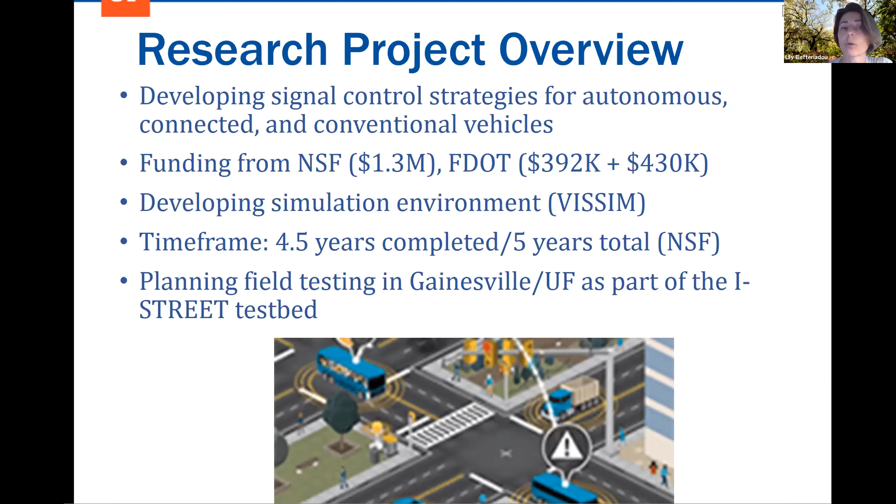This presentation today is on the two projects that I mentioned, one by NSF and the other by FDOT, and we are toward the end of that. We are in the last year. The project expires in August, even though this last year is the transition to practice. Because of COVID-19, we may not be able to do all the field testing that we're planning, but there's also a simulation component, as well as the field testing component.

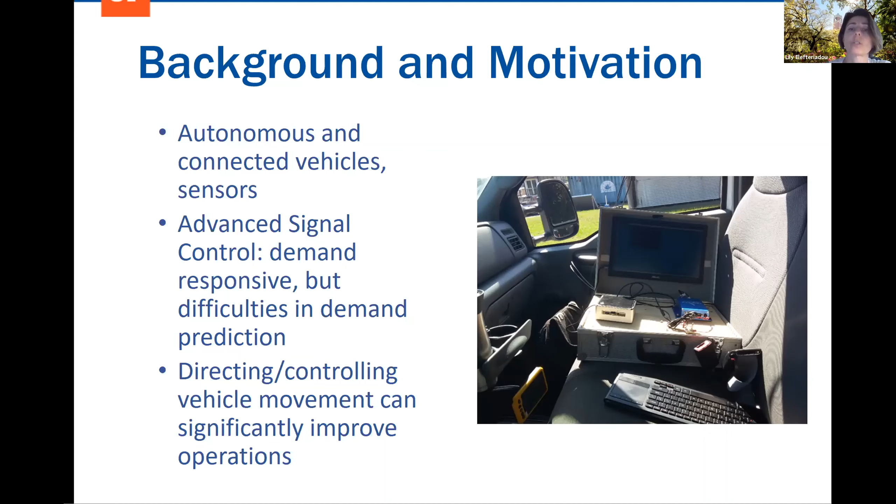The basic idea is taking advantage of autonomous and connected vehicle technologies—communication with the infrastructure, sensors, and autonomy—to optimize the way we do signal control. The state of the art with signal control is to be demand responsive, but when you have the ability to directly communicate with vehicles and get advanced information about their arrivals and destination, and in the case of autonomous vehicles to provide them with a recommended trajectory, that gives us a great opportunity to optimize the signal control together with the movement of the vehicles.

In our project, the objectives are first to develop novel optimization algorithms that would jointly optimize the autonomous vehicle trajectories and the signal control, so that we can minimize travel time and maximize throughput. We also consider connected vehicles and conventional vehicles, predicting where we anticipate they would go based on acceleration and deceleration capabilities.

To do that, we also developed a simulation environment for testing. Because the project also has a transition-to-practice component, we developed detectors and used data fusion algorithms to collect data in real time in the field about the movement and location of conventional vehicles. The culmination of that is to implement the algorithm at an intersection in the field.

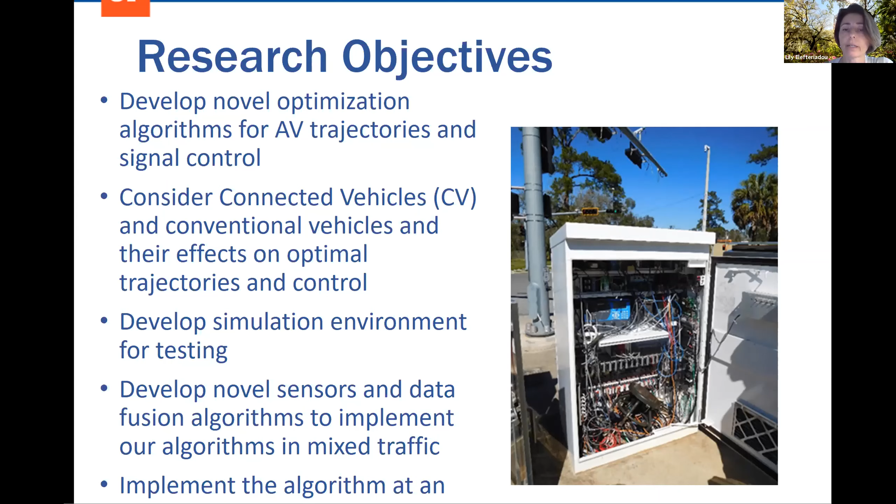The intersection we are working with is on the UF campus—the Gale Lemerand and Stadium Road intersection—which already has all the sensors implemented. I'll talk a little bit more about the testing that we're doing there.

So what I'm going to do today, because this project has many different legs and directions, is give an overview of the big picture. In the end, I'll provide a list of publications if you have specific questions on any of those aspects.

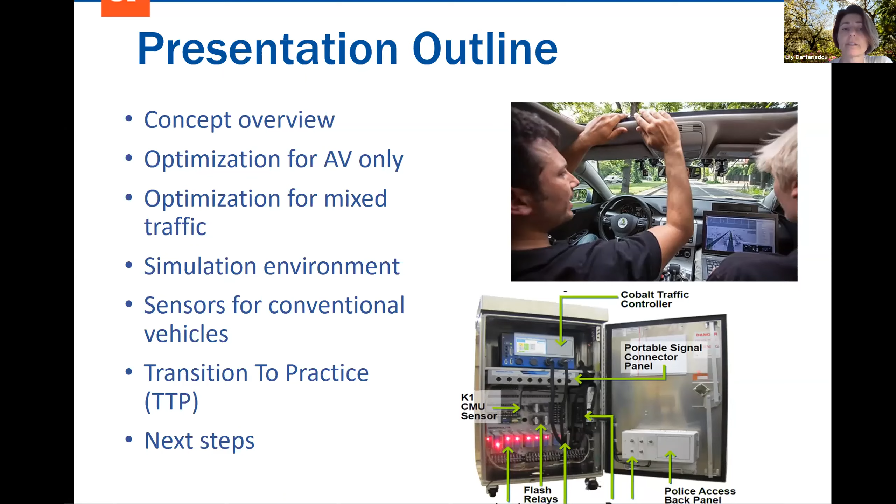I'll talk about the results from simulation for autonomous vehicles, for 100% autonomous vehicles in the traffic stream. Then I'll talk about the process for optimization for mixed traffic, our simulation environment, the sensors and how we are dealing with that in the field, and our transition-to-practice work and next steps. Here's the overview of what we're accomplishing.

We have information that flows from autonomous connected vehicles into our sensor fusion. We have information exchange with connected vehicles, and one-way information for conventional vehicles where we detect their location and are able to track them. This information is synthesized and used as input into our algorithm. Our algorithm generates optimal trajectories and optimal signal control. The optimal trajectories are sent back to the connected autonomous vehicles, recommended trajectories are sent to connected vehicles, and the signal control is sent to the controller.

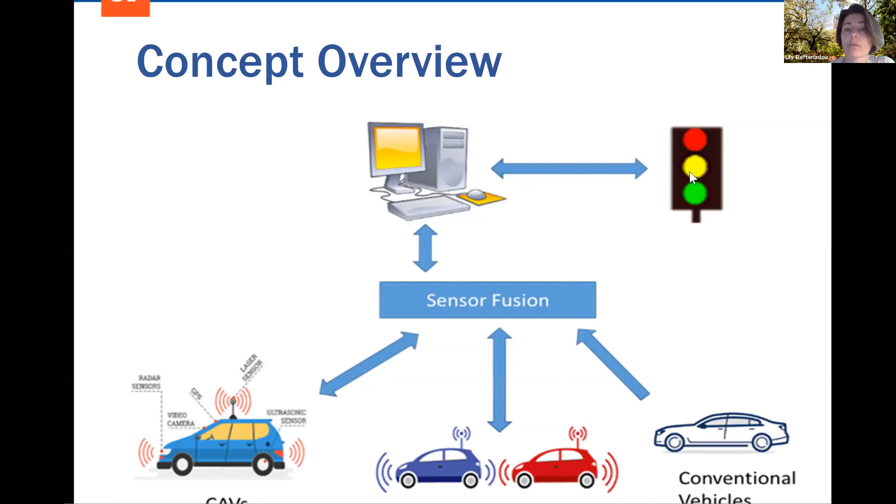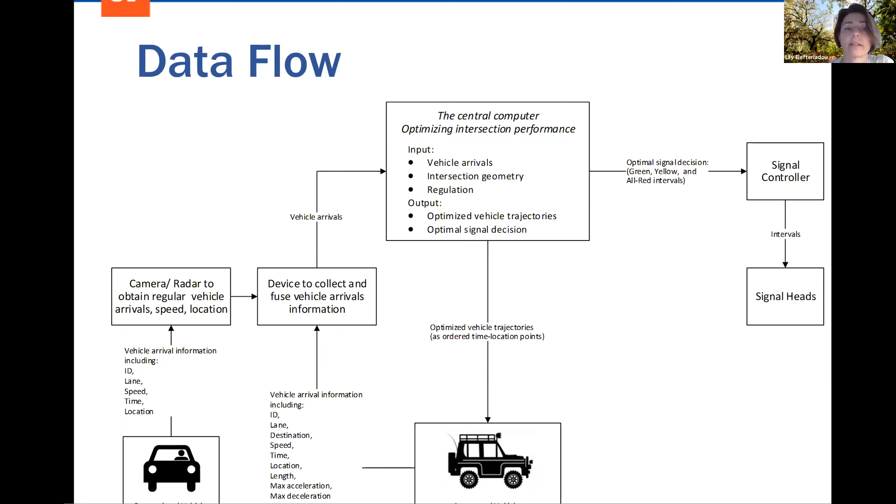This is kind of the same information, but in terms of the data and the flow of the data within this concept.

Let me say that this doesn't happen for all volumes. There is a time where you reach the capacity based on the saturation time headway, and beyond that, you're not going to be able to add more capacity to it. So the system is constrained by that saturation time headway. But what we're doing is we are planning the trajectories such that the vehicles are able to depart at that saturation time headway and at the maximum speed.

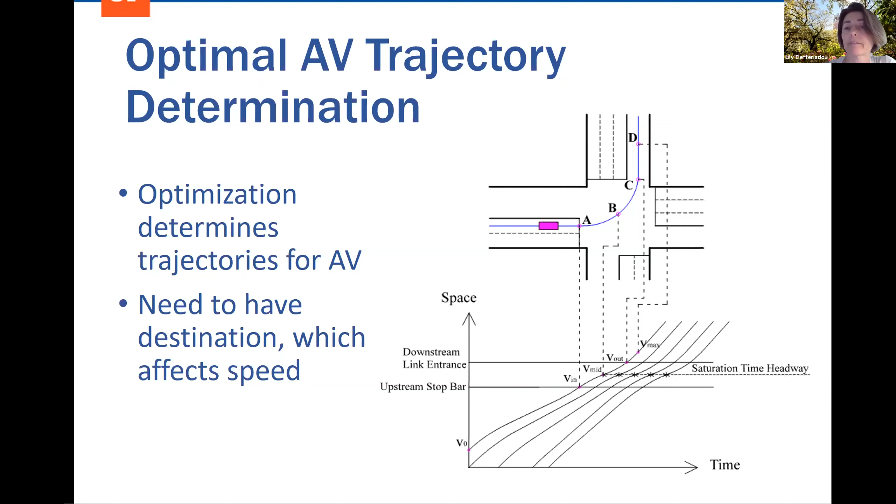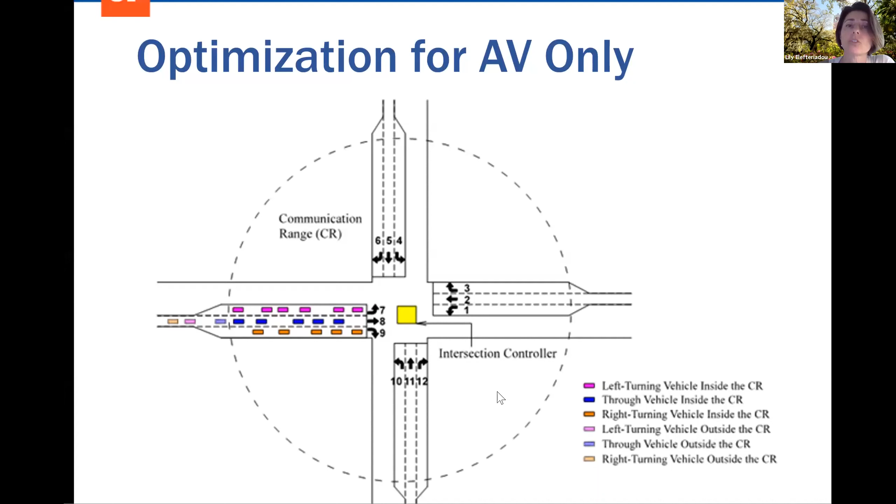So for this first set of results, for this type of intersection, the optimization process follows this graph where we are looking at optimal trajectories for lead vehicles versus optimal trajectories for following vehicles, so that the follower would follow the hypothetical optimal saturation departure curve when it can do that. In some cases, the vehicle cannot accelerate quickly enough to reach that, so we have constraints on that.

The optimization process that we used here was based on—oops. Can you hear me, Charlotte? Yes, I can hear you. Okay, great. I got a message from Charlotte that she could not hear.

The objective here is to optimize, as I said, the lead vehicle and then the follower vehicle, and in this particular case we use genetic algorithms for the optimization.

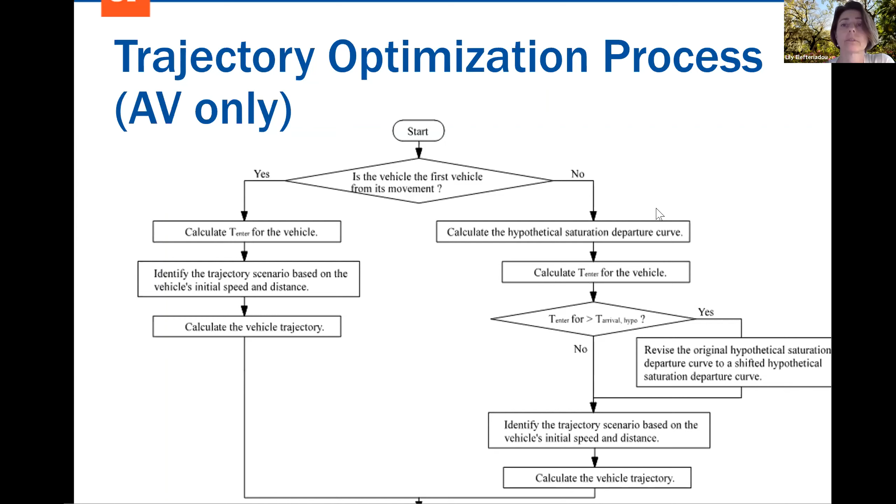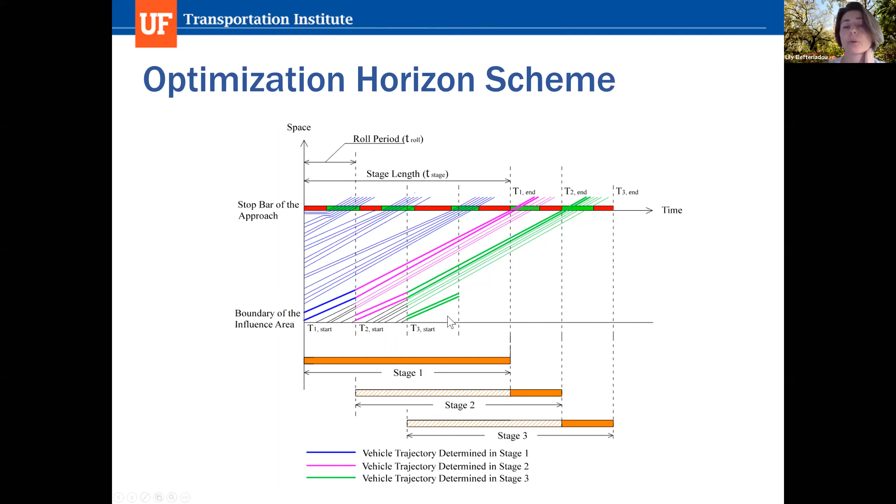This is a graph that shows the optimization horizon scheme. So the way we are handling the optimization is we have the vehicle arrivals here in the first time period. We have arrival information at the first time period, which is then projected to signal timings later, so we can project what the trajectory should be together with what the signal control should be at a certain time later. And we have stages for optimization, which we then update based on new arrivals, because this type of information is what we have from each approach.

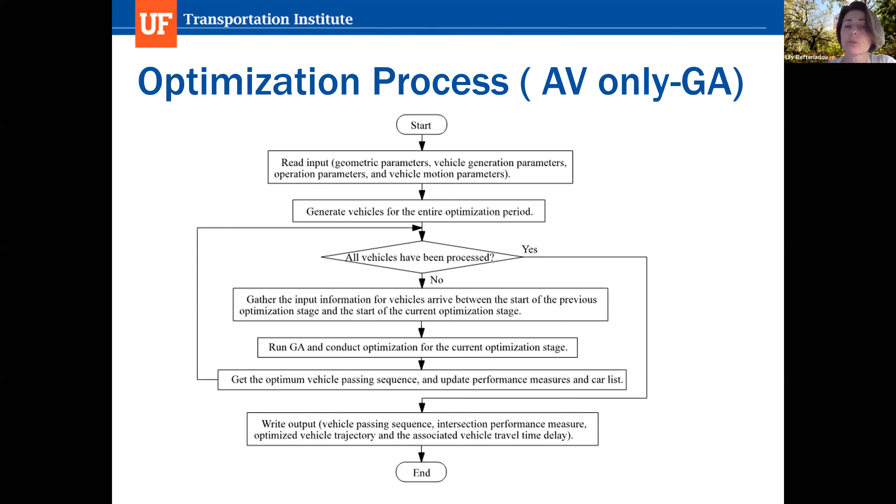And this is the optimization process where you have some initial data on the geometry of the intersection. When it's simulation, we have vehicle generation parameters that we can manipulate. So we generate the vehicles for the optimization period, and then we optimize the movement of vehicles, using genetic algorithms to do the optimization for each stage.

Let me get to the results here. I'm going to show some comparisons in this graph, or these two graphs. I'm showing comparisons for balanced demand, meaning we have similar arrivals from all of the approaches. The top left shows travel time versus demand, and the dark blue shows actuated control.

Lighter blue shows the results from our algorithm. So what this is showing is that for lower demands in terms of vehicles per hour per approach, there isn't really much of a difference in delay between actuated control and our algorithm. When you get to the higher demands, 1400, 1600 vehicles per hour per approach, that's when you see most of the savings, because at that point we're able to arrange vehicles much closer together, and so they depart at the saturation headway, and we're also optimizing in such a way where we take advantage of this two-way information between vehicles and the intersection.

So the delay we found in this simulation is reduced between 16.3 and 79.3 as a function of demand. Similarly, the bottom graph shows throughput as a function of demand, and again, we get most of the benefits in terms of throughput at the higher demands. For the lower demands, it really doesn't matter a whole lot.

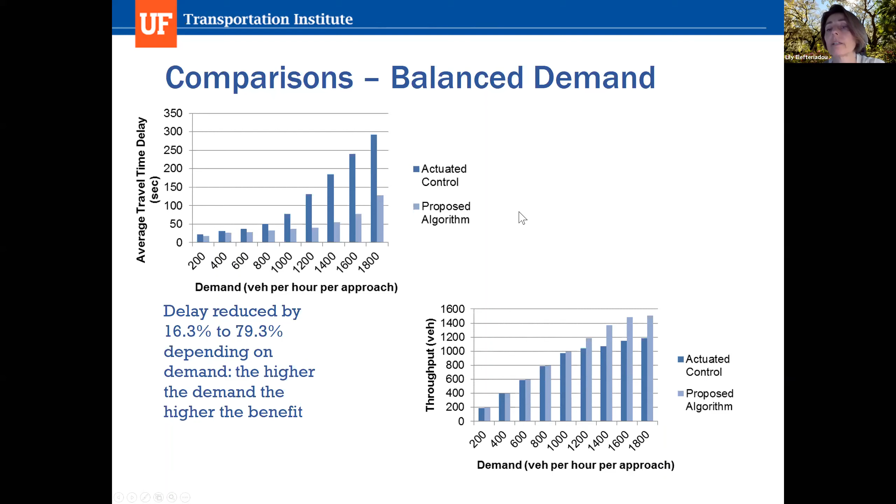This is the same graphs, but now for unbalanced demand, meaning the two approaches have more demand than the other two approaches. So we have a main direction and a side street direction. And because of the way we're optimizing, it really doesn't matter whether the demand is balanced or unbalanced.

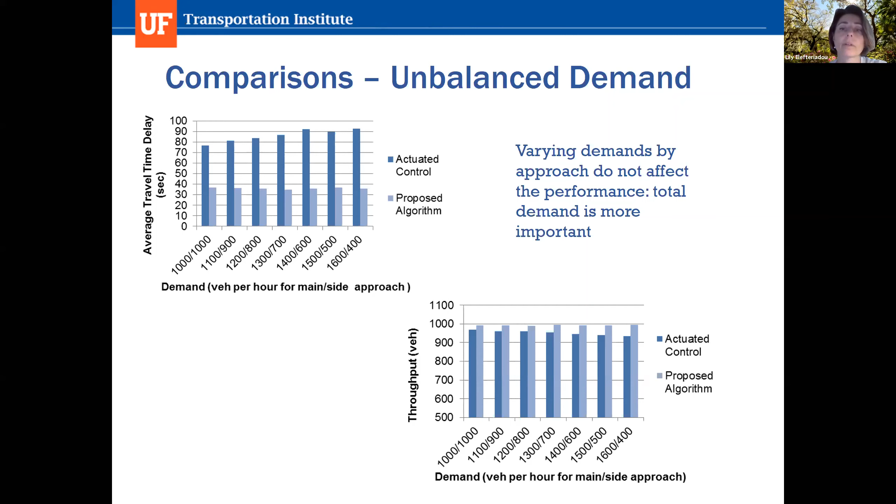We get similar results and similar savings. Another thing we evaluated is the effects of the communication range.

And again, we're talking about 100% autonomy here. The results I showed so far are for 100% autonomy, and also for simulation. When we started to think about implementing this in the field, there are slightly different considerations, because in the simulation...

You can start with a certain set of vehicle arrivals. So in the simulation, you can generate all the vehicles and plan it in advance.

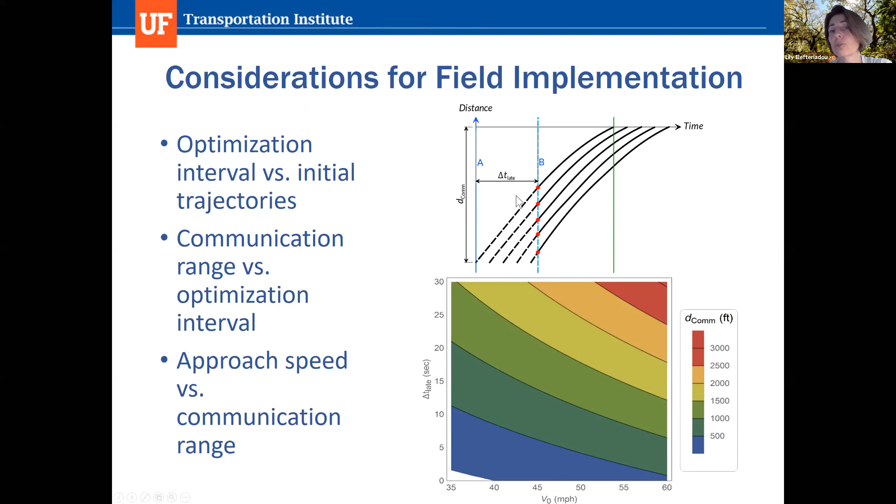Okay, I'm going to get to the second application, which is now for mixed traffic. When you have mixed traffic, you need to maintain conventional signalization. So in this case, we have to have the yellow and all-red with a certain duration, and we have to follow the phasing in a more traditional way.

But the concept is very similar again, and the way we are doing the optimization is we have a set of feasible phases, and then we optimize based on those. When you have autonomy, you have a lot more flexibility with the types of movements and the combinations that can be used.

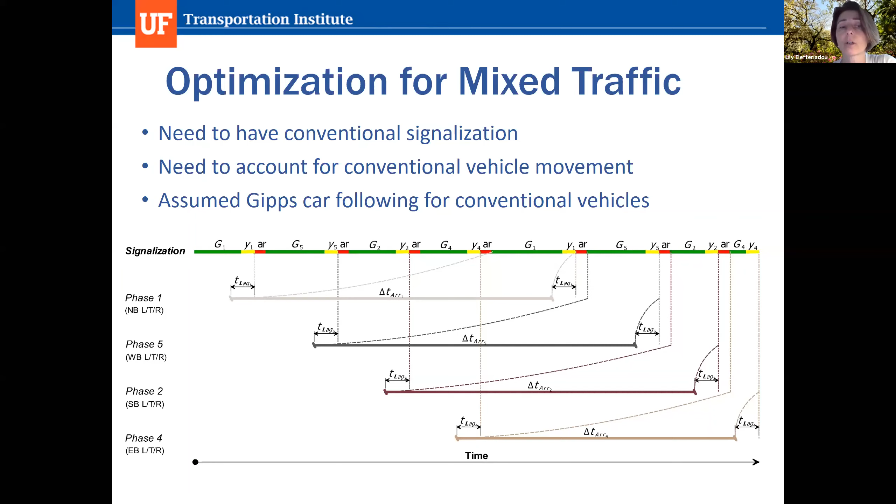So as expected, when you have a higher percent of AVs, you have lower delays. You're able to arrange the vehicles much closer together so we can improve the throughput and lower the delays. Of course, as expected, the minimum saturation headway significantly affects the travel time. We're able to increase the throughput in that way.

What we found is that the communication range does not significantly affect the delay beyond a certain distance. And what we also found is that with higher flow rates, we have lower effective green, so we have more frequent switching between the phases.

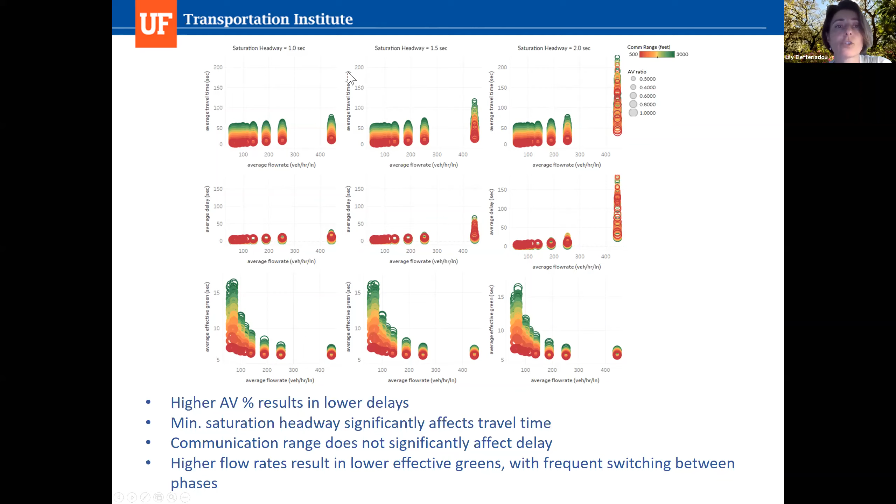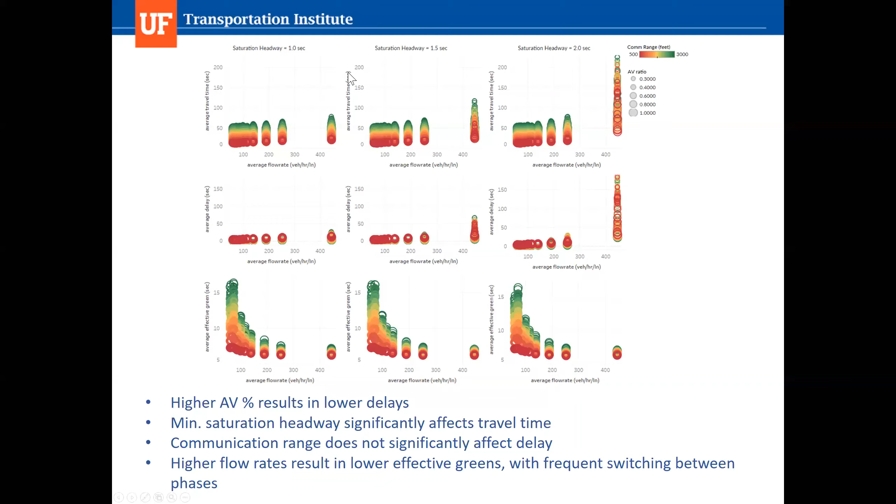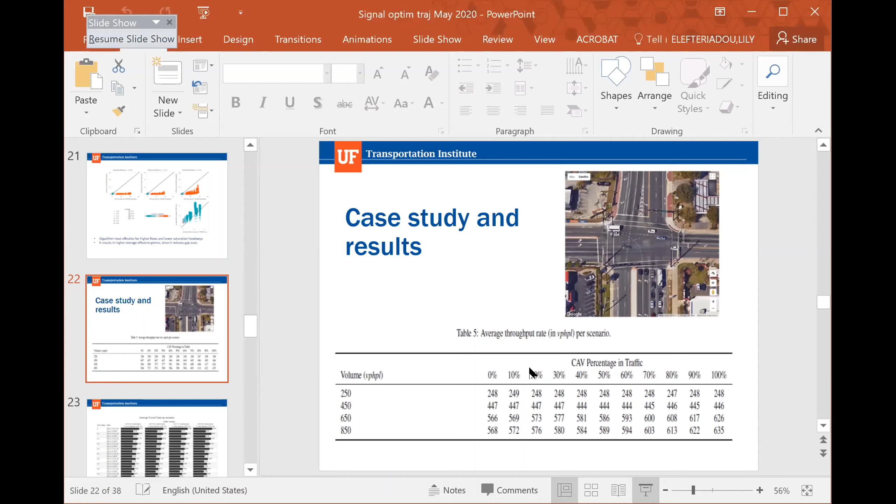And these are the results. Charlotte, I'm not sure if you're seeing this. It says my screen sharing has paused. Yeah, we are stuck on the previous slides where you're showing the flow rate. Okay, let me see why. Not sure why this is happening. I think we should go to slide 22. Are you seeing it now? Yes, yes, perfect. Okay, good.

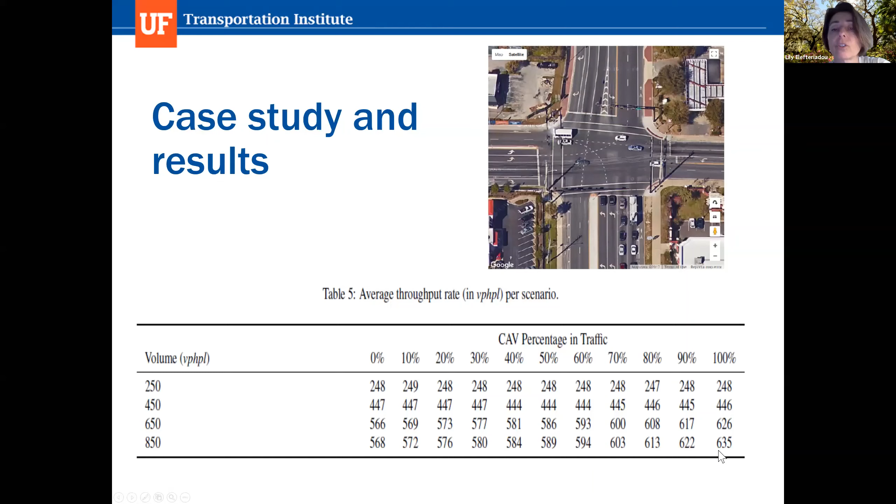So what the numbers show here is the throughput per scenario as a function of the CAV percentage, and this is for the intersection shown here on the graph. We simulated an intersection that's here in Gainesville with multiple lanes and multiple movements. You can see here the throughput when you have, at low volumes, the arrivals are equal to departures. When you get to the higher demands, you're getting to the point where you have congested conditions, and so your departures are lower than your arrivals. But when you have 0% autonomous connected vehicles, your throughput is 568 versus 100%, you get up to 635.

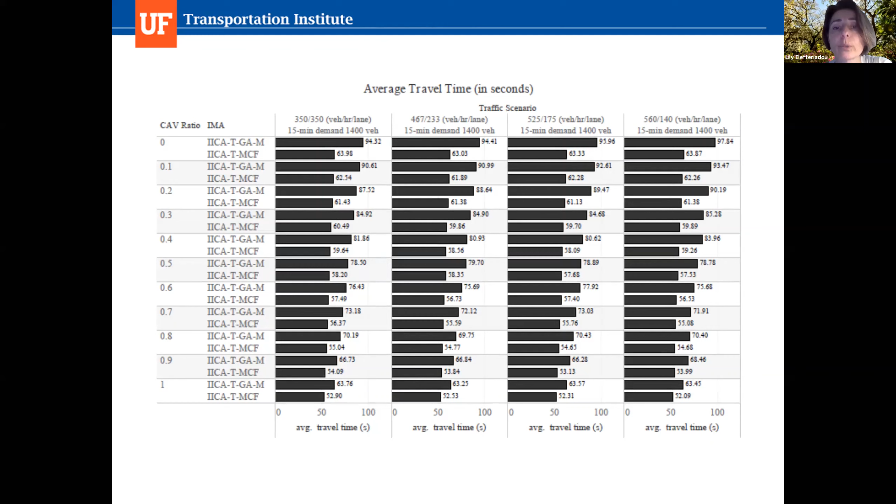And this graph shows a comparison between different scenarios, and actually we did a comparison between genetic algorithms and a new method, the minimum cost flow, and the second one had generally much better results, both in terms of throughput and travel time.

Now let me talk a little bit about the simulation environment, where one of the things we're working on, and we're not there yet, is developing a logic for autonomy in the loop. So we're using the autonomous vehicle here at UF, the CIMAR lab, and we want to have that in the loop of VISSIM in such a way that we bypass the sensors that the vehicle uses, but we use its logic. The reason for that is with VISSIM, in order to simulate autonomy, it's not as simple as modifying the car following, lane changing, and all that, because we don't know the way that an autonomous vehicle would function.

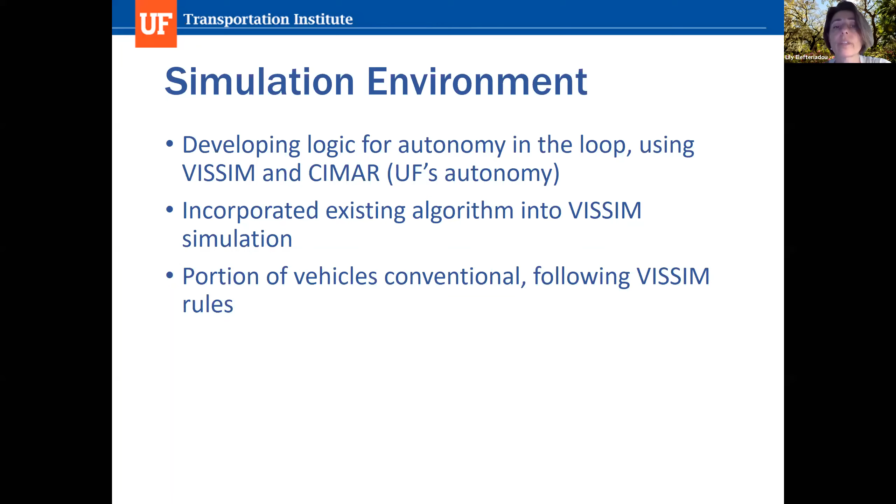If we are able to put that in the loop and collect information in this way, then we have a better sense of what those types of algorithms are able to do within a mixed traffic environment. So this is what we're working on: we have for the autonomous vehicle its location for every step, and it also has the ability to see within this circle. So we provide information from the micro simulation that would translate into what sensors would typically see, assuming that the sensors are 100% reliable and accurate. We provide those local coordinates to the autonomous vehicle, and the autonomous vehicle decides its trajectory based on that information.

We've run into some issues with synchronizing the two software packages, but we hope we'll be able to resolve that soon.

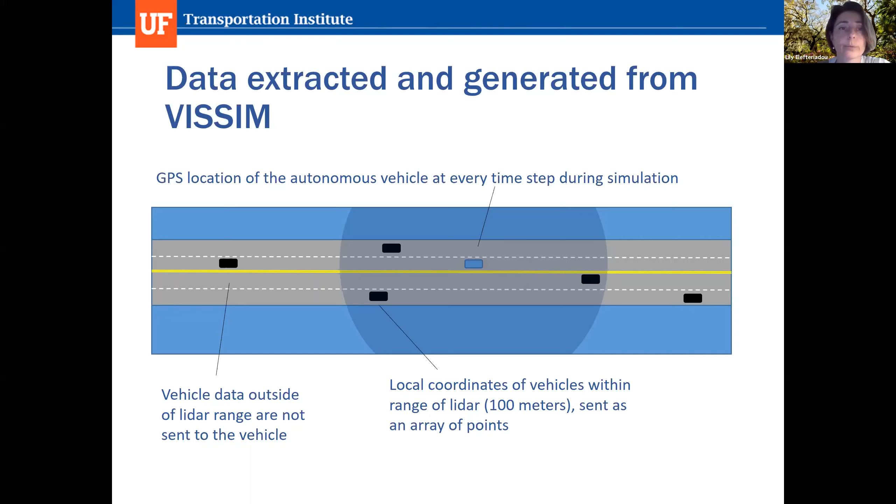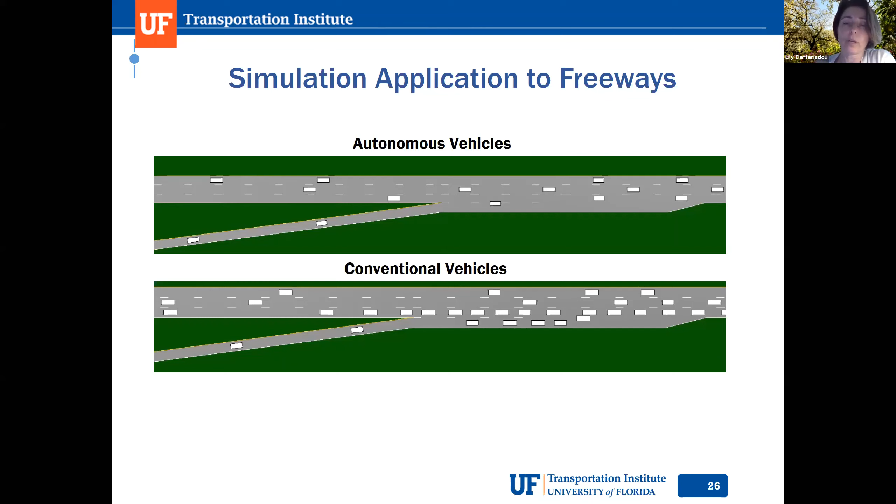The last part I wanted to talk about is the transition to practice, which is really the hard part, because a lot of different things have to come together for us to be able to work to do this effectively. So the idea is that we would implement the algorithm I shared with you first in a closed course, and then in a real intersection, and we would be able to do an evaluation of before and after conditions.

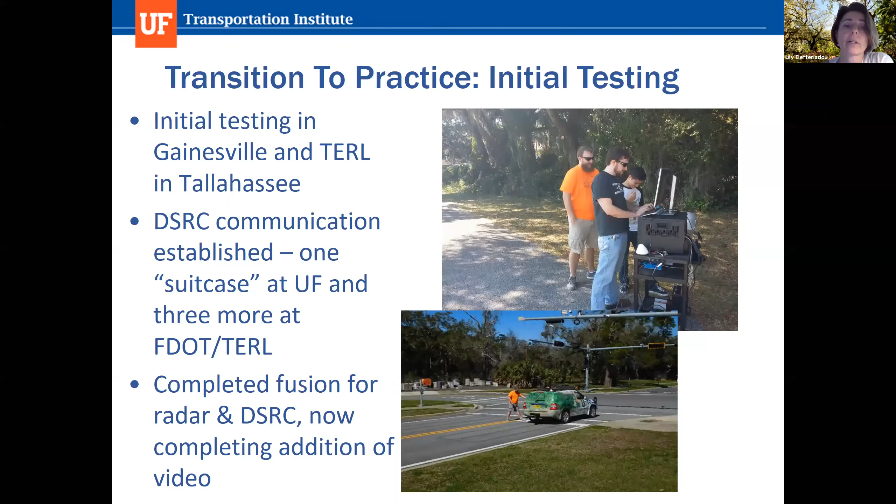So we brought our equipment there and several vehicles, and we did extensive testing to connect our computer to the controller that's there. We tested the communications to the vehicles and to the controller, and also tested the video. So I'm going to show you a video from that test.

Oops. Okay. Let me see if I can hold on a second.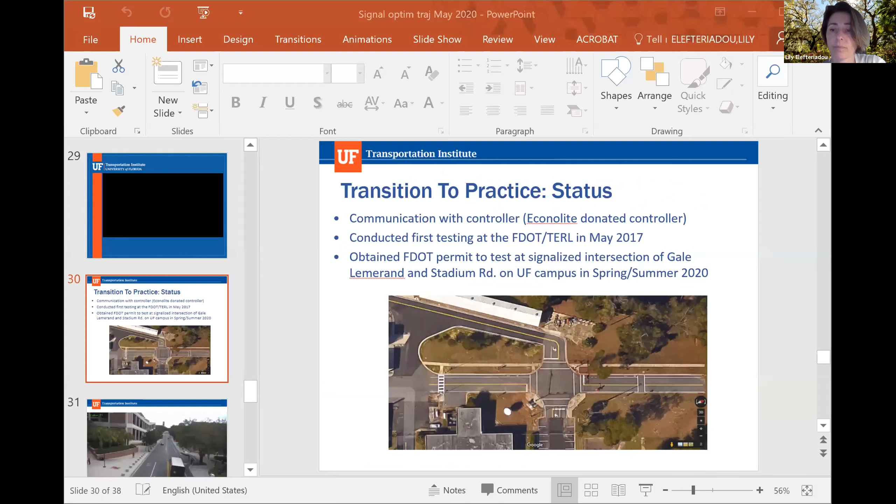Okay, hopefully you can see it. So what I'm going to show you is images from a drone we had at the lab, and we had 6 or 8 vehicles. Conventional, we had some connected vehicles, and we also had some.

So what I'm showing here is vehicles approaching the intersection, and the idea was that the signal would turn green as the vehicle was approaching the signal. At that time, we also had developed a very rudimentary app so that if the vehicle was conventional, we would be able to send recommendations to the driver on the optimal speed the vehicle should follow in order to clear the green. We've been doing some more experiments on that, and hopefully for our next testing out in the field, we'll have a little bit better information.

It took us a couple of days to figure out all the connections. There's a lot of different details that point to this type of testing. Yeah, we spent pretty much 2 full days trying to get everything to communicate. One of the important elements there was the communication from our computer to the signal control, so that took some doing.

I'm going to continue with the next one. This is kind of the view of that intersection, and one of the constraints was that one of the approaches is at an angle, so you have to have much lower speeds than what you might have in an intersection in the field. But given that our objective was to make sure the equipment was working properly and the communications were in place, it really didn't matter to us that much.

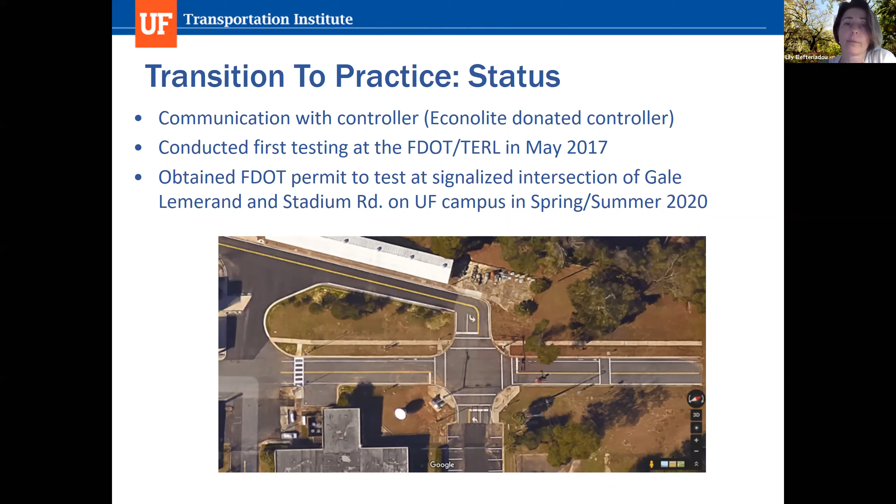Here's the intersection. I'm going to show you one of the approaches to that intersection in the field, and show you how the trajectory optimization works. The little dots here represent the optimal trajectory, and what you see from the green is the actual trajectory. In this particular case these are conventional vehicles, but we were just testing how this would work, and testing the sensor fusion, which is based on LiDAR, radar, DSRC, and video.

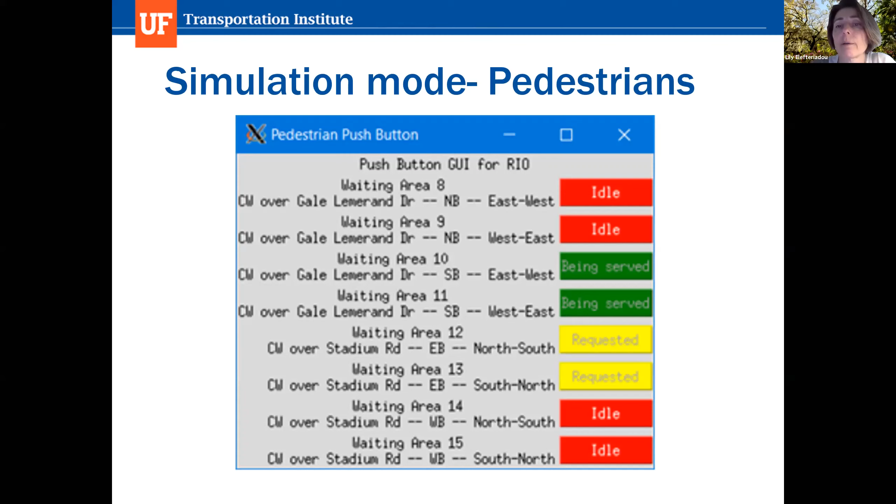Let me continue. One of the other components we're working on is incorporating pedestrians. At this point we have developed in the simulation an equivalent pedestrian push button so that we can provide a call into the simulation. We've been testing this within the overall optimization so that we're able to implement it at the intersection. The way we're handling pedestrians is as the equivalent pre-timed phase, so whenever there is a call, we provide that particular phase without a variable time.

Based on the experiments and the work we've done so far, I've summarized some of the risks and challenges. The major one is detection range and accuracy. What we're finding is that there is no single method that has enough accuracy so that we can rely on optimization with it, and that's where data fusion has become essential. So we're using multiple different sensors to get an accurate count and to develop trajectories.

This may not be the most realistic to do at just any intersection. This is all at the testing and experimentation phase. So I wouldn't say this is ready for prime time, because it may be too expensive to have all these different sensors in a large network.

We ended up changing the algorithm so that with driver behavior for conventional vehicles, we would be able to modify the algorithm or the optimization settings. So we optimize more frequently to adjust for movement from conventional vehicles that does not follow what we expect is going to happen.

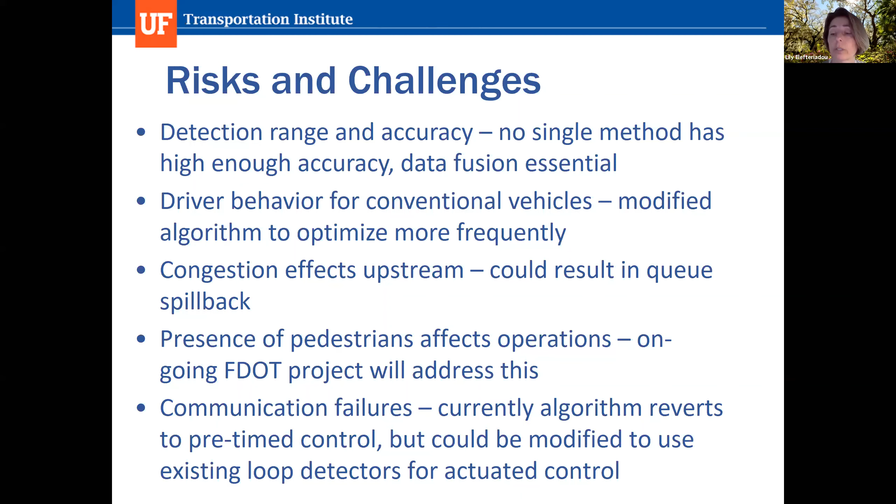Where we are right now is testing the Python code, which is what we've developed this on, for several different scenarios, and we're evaluating how the trajectories look, and that's where the visualization tool we're finishing is helping us do just that. This has been very useful to do.

We're doing more field testing for the fusion for multiple inputs. We plan to do some testing for pedestrians, even though we're simplifying it, so that for pedestrian phases we have pre-timed phasing. And we plan to continue testing through the summer. The NSF project ends in September.

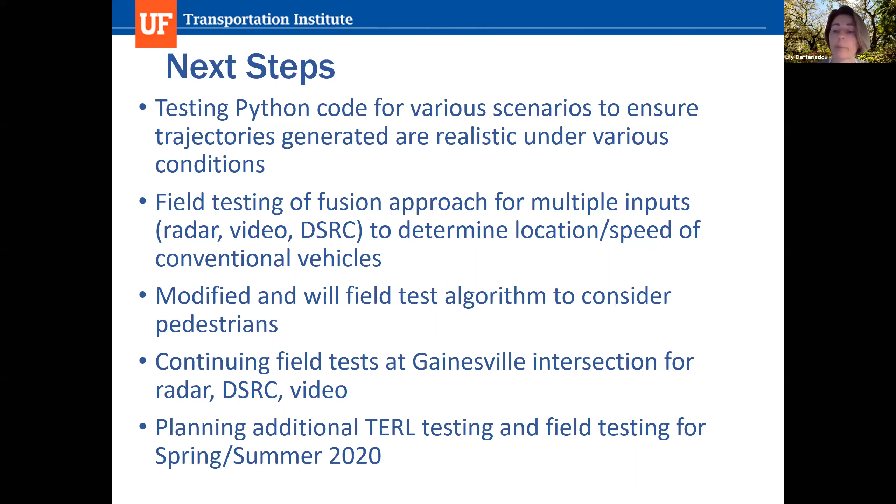Just some closing words on iStreet, because this project is part of iStreet, which is the real-world transportation testbed in Gainesville, in collaboration with the University of Florida, the Florida Department of Transportation, and the city of Gainesville.

We couldn't be doing all this experimentation for this project without the city of Gainesville's assistance, because they're the ones giving us access to the cabinets. They've helped us with installation of the different equipment, and they're doing the same across other research projects related to iStreet. I'm providing the website if you want more information on iStreet projects.

We have several different projects. The map shown here shows where the instrumentation is. The purple is I-75, the red is arterials, and the green is the UF campus.

I have a list of publications that are out so far, and we're working on several more. As I said, there are several different components to this: some relate to fusion, some to full autonomy, some to field testing. So several different aspects to this.